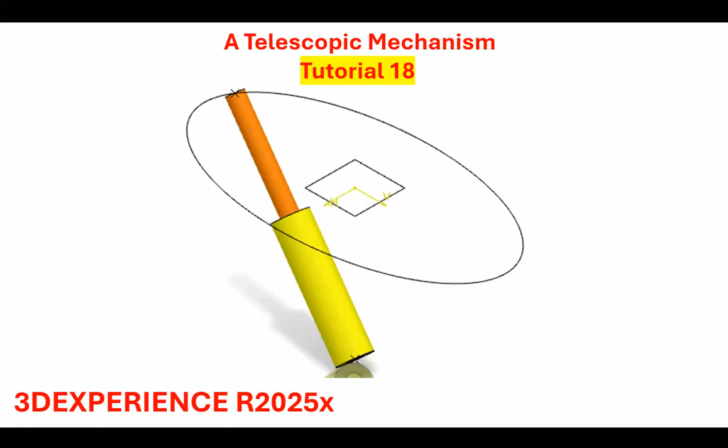Good morning, people. This is tutorial number 18, which is modeling a telescopic mechanism in the 3D Experience Release 2025X platform. Now, what we have here is three parts. The parts are the base. This is the base that's fixed in space, is not going to move.

Okay, and I have a big tube and an inner tube, small tube, and the bottom of this big tube is going to be coincident with the point that's in the base, and that makes a spherical joint. This small tube is inside of that big tube, and it can go up and down. And that's going to be either a cylindrical or a prismatic joint. I'll make comments about that in a minute. And the top of this small tube is actually traversing that curve.

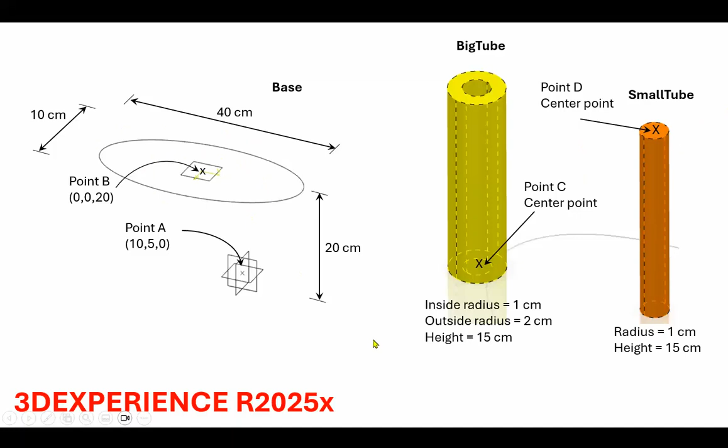Okay. Now, first of all, if you make this thing cylindrical instead of prismatic, there will be an extra degree of freedom that we don't want. That's going to go away. So I'll make this thing a prismatic joint. And notice that because the bottom is spherical and the top is the point curve joint, this whole telescopic unit can actually spin about its own axis, and we don't want that. This is why you do a point curve joint, a prismatic, and a spherical joint.

But then to take away that extra degree of freedom of spinning motion, you need to create a point surface joint. And the point belongs to the base, and it will go through this surface, and this surface really is the plane of either the big tube or the small tube. It makes no difference. So that takes away the spinning motion. So that's what this comment is about. First of all, we want prismatic here, not cylindrical. And then at the end, I want to create a point surface joint that may not be obvious why.

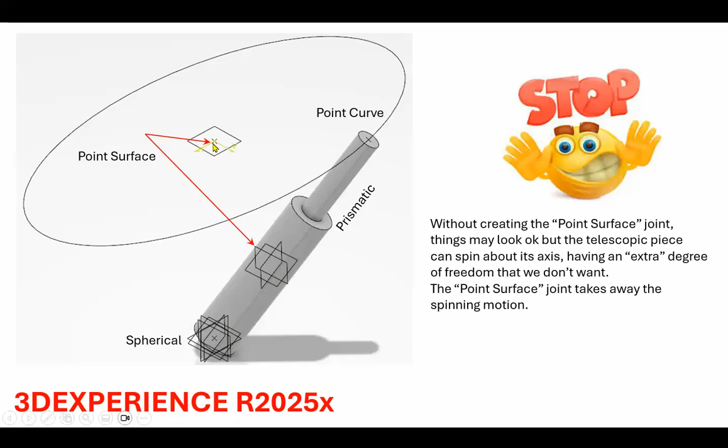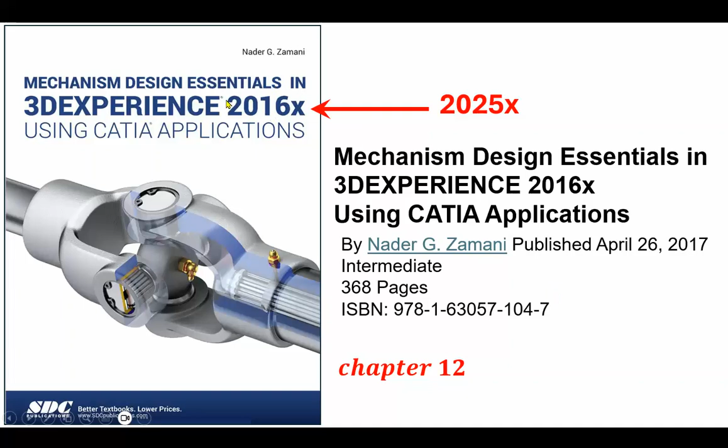This is coming from chapter 12 of the textbook that was done 9 years ago. And instead of revising this book, I've prepared these video tutorials. Okay, let's go ahead and do that. So we go here. We're going to start with an assembly.

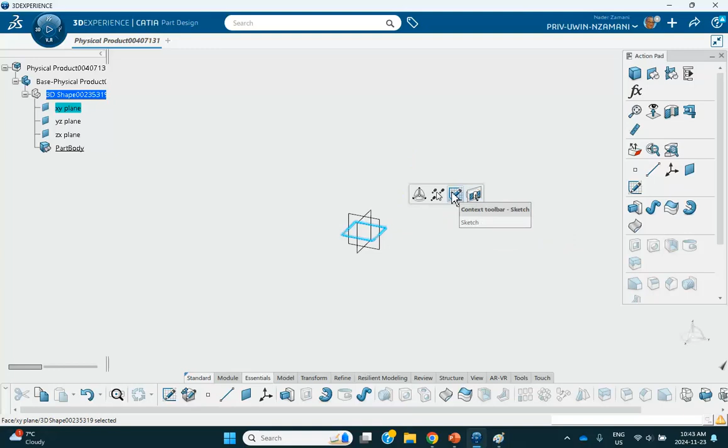Insert the base. So right click, insert 3D part. This is going to be the base. Let me modify the name slightly so that we know what it is. Here's the base, and there's an instance base. Say okay. Let's double click on it and make it. Very simple. On a horizontal plane, I will sketch a point that is 5 and 10 away. Actually, let me exit this. Just create a point with coordinates x of 10 centimeter and y of 5 centimeter. So instead of doing it in Sketch, I created it right there.

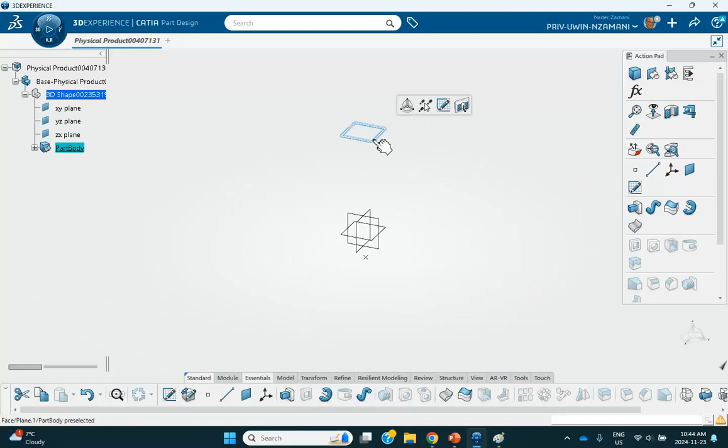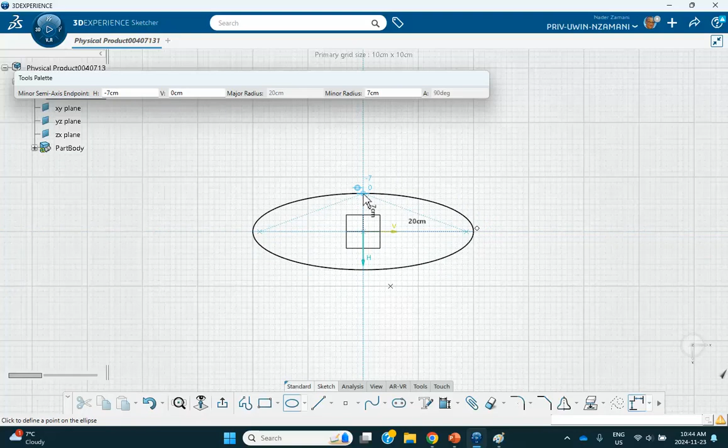Okay. Now, I want to create an ellipse up there which is 20 centimeters away. These dimensions really don't make that much of a difference, but I'll make a plane offset from this plane 20. Okay, and it's right up there. And on it, I will sketch that ellipse. So here is the ellipse. I want this to be roughly 20, and this roughly 10. Okay. Exit. So there is my ellipse.

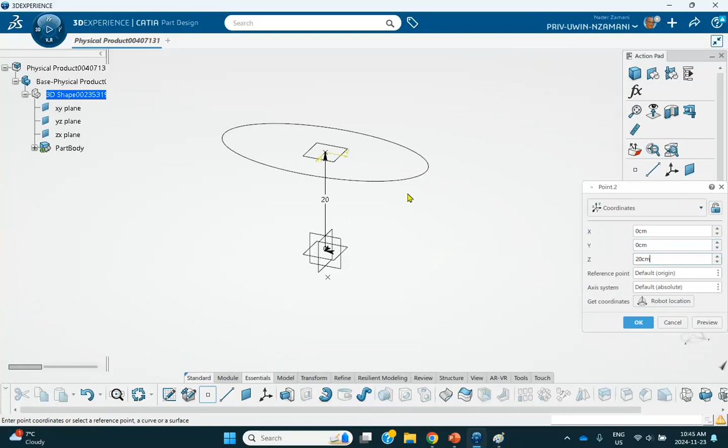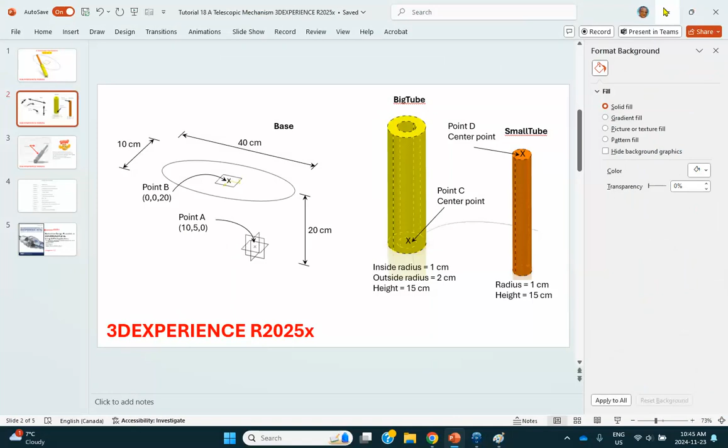And I want to create a point here because later on we're going to be using it. I mentioned to you why. So height of 20, and this is 0, and this is 0. Okay, so it's going to be right there. So what I have here is that plane, that point, and this point was already created, 10 and 5. Okay, so that takes care of this.

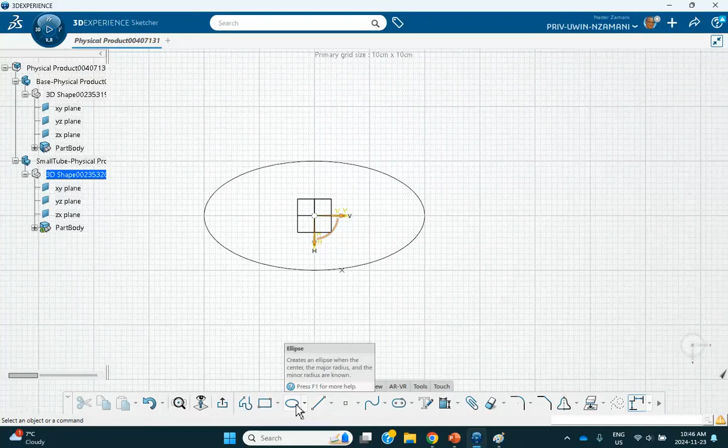So let me go all the way to the top, insert 3D part, and I'm going to call this thing small tube. Let's make it. It's just a cylinder. So I'm going to double click on this thing. On XY plane, I will sketch a circle of radius 1.

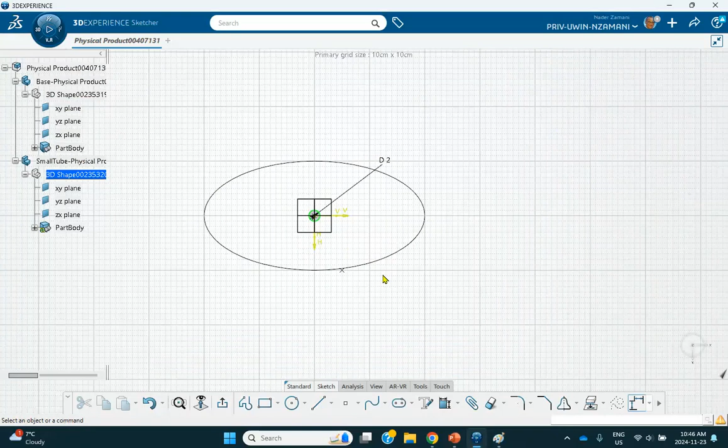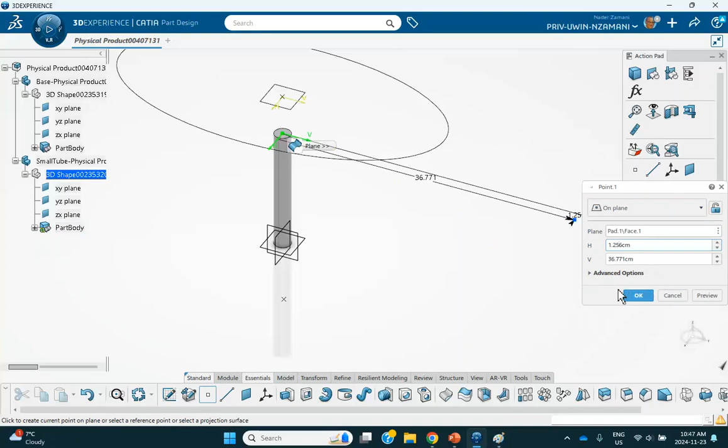Radius 1 centimeter. Actually, this is the diameter, so I'll make diameter 2. Radius 1, diameter 2. Okay, fine. And exit. And pad it by 15 centimeters. There we are. I also want a point on top of this. So let me make it point by circle center. I select that, so the point is created. Oops. Circle center. Try it again. Okay. Let me get rid of this.

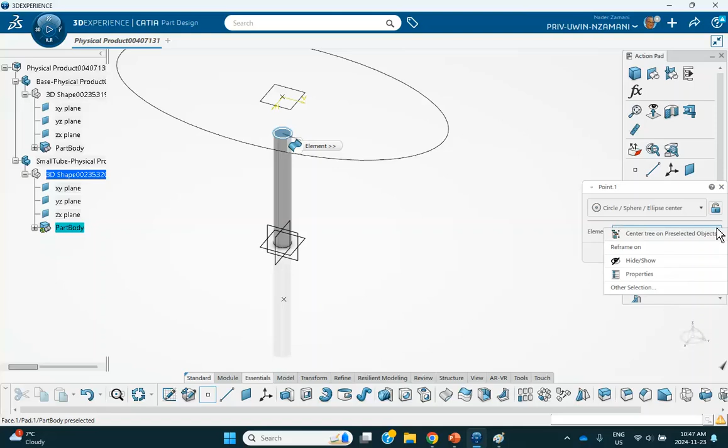Clear this. It's easier if I just close it. Let me try it again. Point, circle center, select that edge, and there we are. And then we say okay. Okay, right there. Now, that takes care of this.

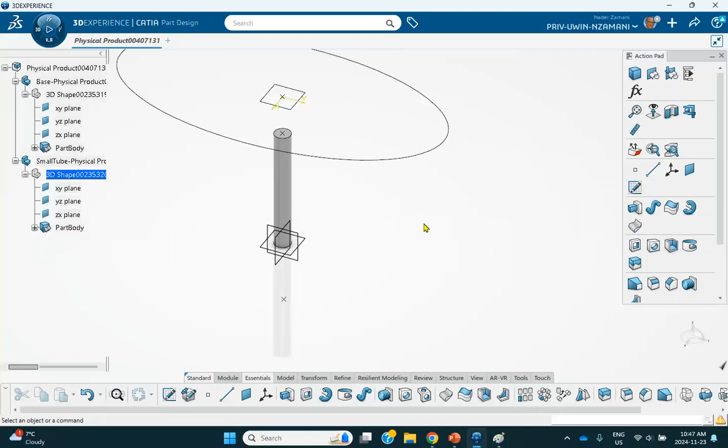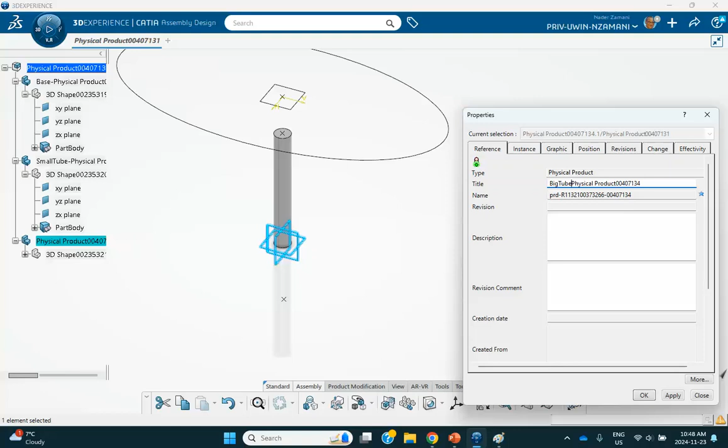So I'll go all the way to the top, insert, right click, 3D part. Let me call this thing big tube. Big tube. Tube. Yep. Let's go make it. So double click on this.

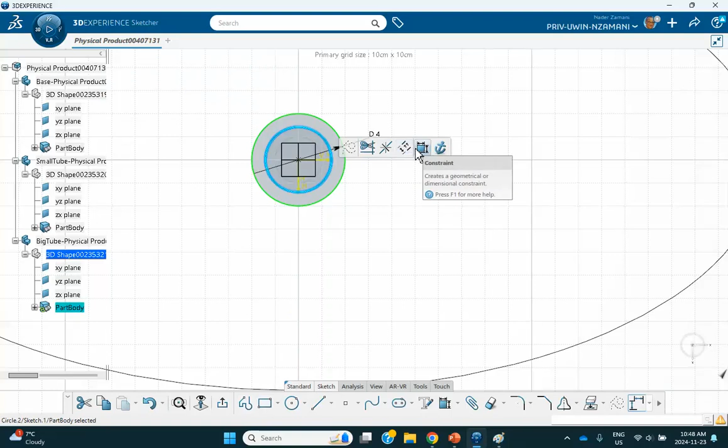On a convenient plane, I'll use the same plane and draw 2 circles because it's going to be a tube, right? So this one, I'm going to make that diameter 4. And another one, the diameter 2. I could have projected that circle, by the way. Diameter 2. And then we say okay. Exit. And then pad it

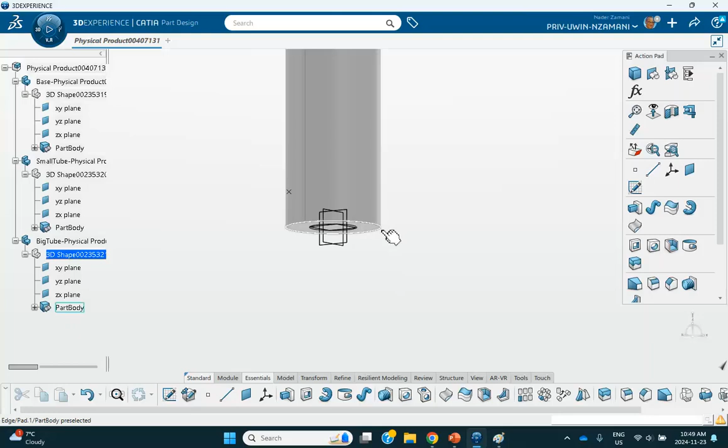by 15. Good. And at the very bottom of that big tube, I'm going to make a point because later on I'm going to make a spherical joint. So that is going to be, well, it is 0, 0, 0, but I can say also circle and that circle. It's going to be the same point. Good. Okay. We are good.

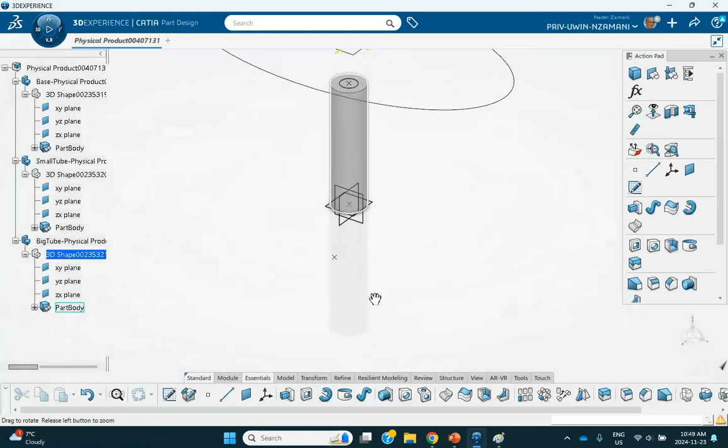So let me go all the way to the top, move these things apart. So I'm going to use the manipulate. Oh, before I do that, let me just fix this higher base. So under engineering connection, fix, the base is completely fixed now. Good. See that it's here under engineering connection.

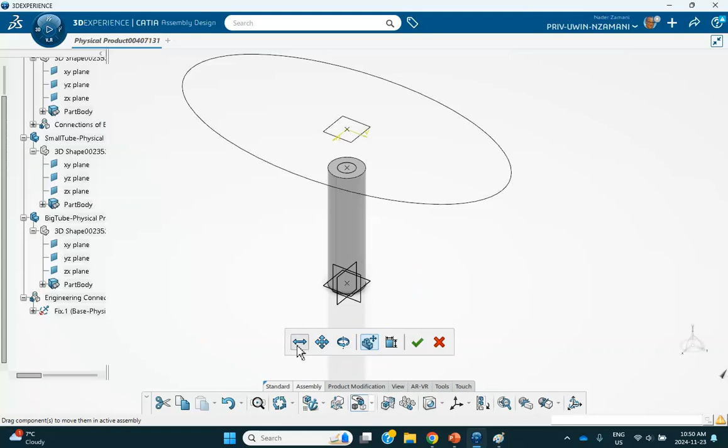Now I'm going to translate this. I'm going to translate it in the direction Y. There we are. This is one of them. This is the other one. So, okay. Now, if we want, we can make the prismatic joint right now. Let me also move this thing a little bit up so that I can see it better. Good. So, we need to make a prismatic joint here.

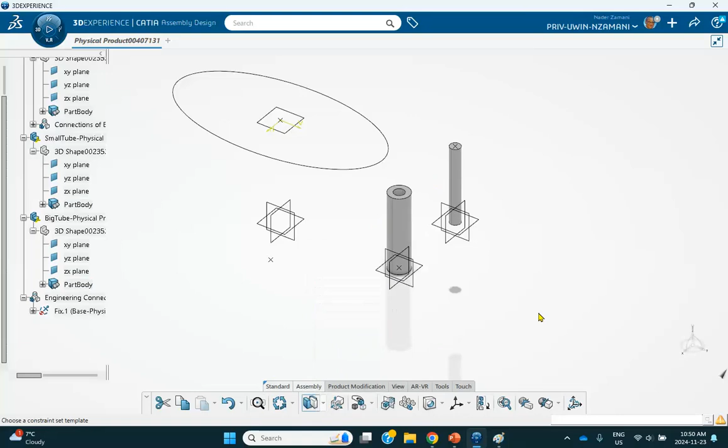So let's go ahead and get the prismatic joint. And the different ways of doing it, we'll do axis to axis, plane to plane. I'll do this one, axis to axis. What is that thing called? I'll use coincidence. I'll use this one. I'm not going to worry about the bottom, the constraint. So axis to axis, plane to plane. So here's what I'm going to do. This axis and that axis, and then the vertical plane of this and the vertical plane of that. That makes it a prismatic joint.

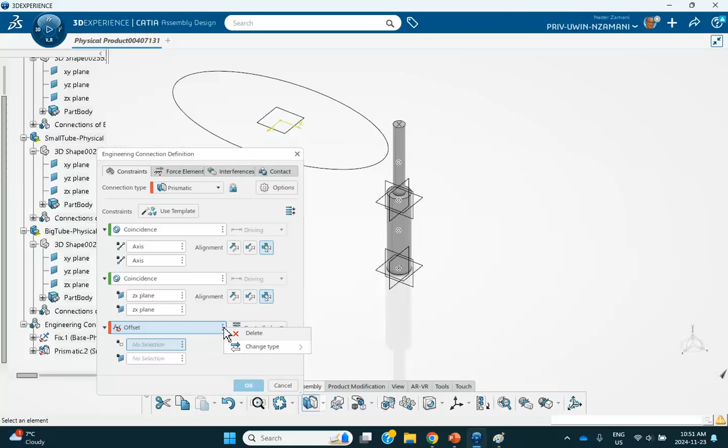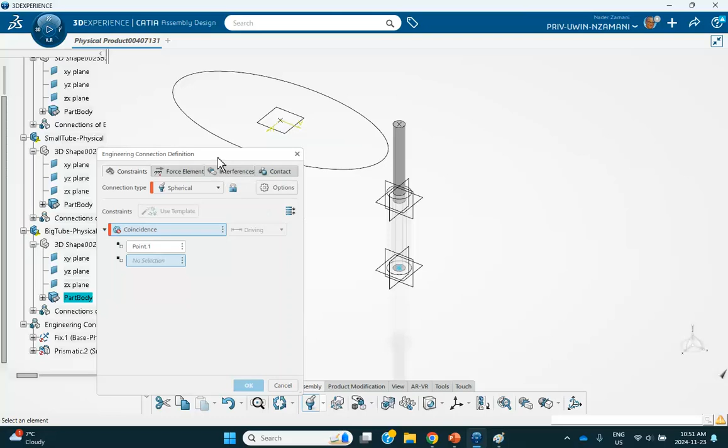Now, we're not going to be controlling this thing, so I might as well get rid of that. I don't want the last item controlled for control purposes. We don't want it, so we say no. Good. Now I'm going to take this point and put it there. That's a spherical joint. So we go here, we go to spherical. We can do point to point, coincidence between this point and that point, and then say okay. Don't worry about clash and update.

There we are. Now I'm going to take this point and put it on that curve. Now that, for example, I can do point curve joint. I don't see point curve here. So I go to engineering connection, pull this thing down and find the point curve right there. And I'm going to make, for example, a point and a curve. Okay. So, and it's going to be controlled, right? It's controlled. So that's what this thing is.

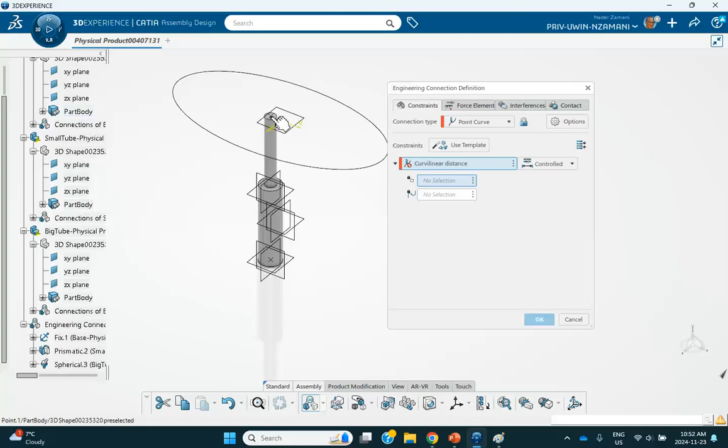So, where is that? The point is right here. It's up this small tube, and the curve is right there. And then we say okay, now, and update. Okay, very good, very good.

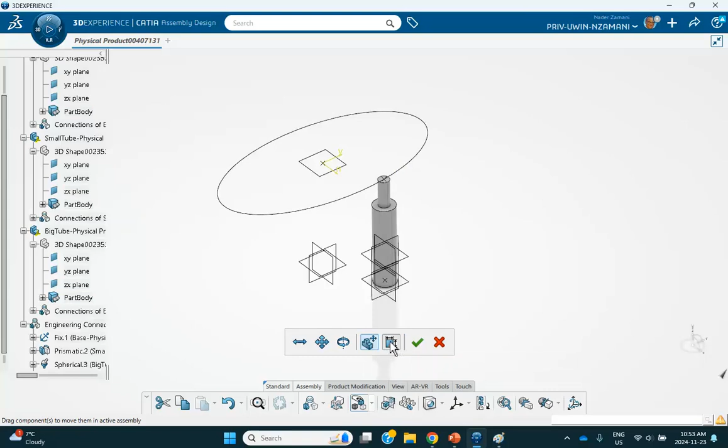Okay, let's see if we can actually check things, see whether things work before we actually go and create the mechanism. So we go to once again move. What is that? Manipulate. I'm going to move this, but I want to keep the constraints in place. So I'll check that, and I'm going to translate this. You see, constraints are respected.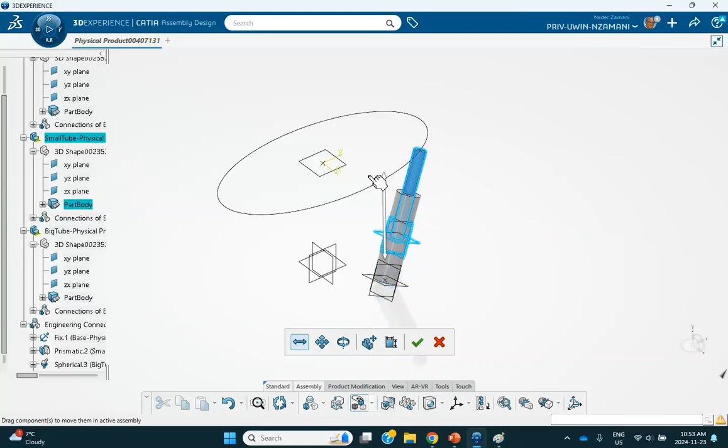And without that, you can just move it, but the problem is that constraints are not respected. That's why you go off position. So just close it. Good. So we are on the right track. Now that point surface joint, I can do it now, or I can do it later. Okay, so let's go ahead and do that now. So we go here.

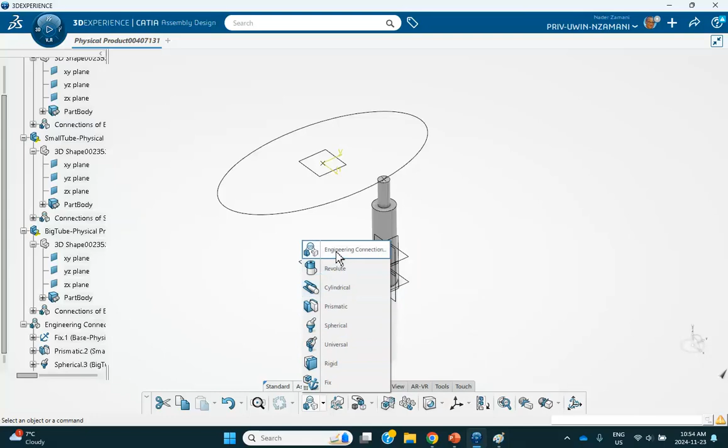We won't see point surface, point curve, and some of these other joints here, so you have to go to engineering connection, hold this thing down, find the point surface joint. Okay, it says the point. I want

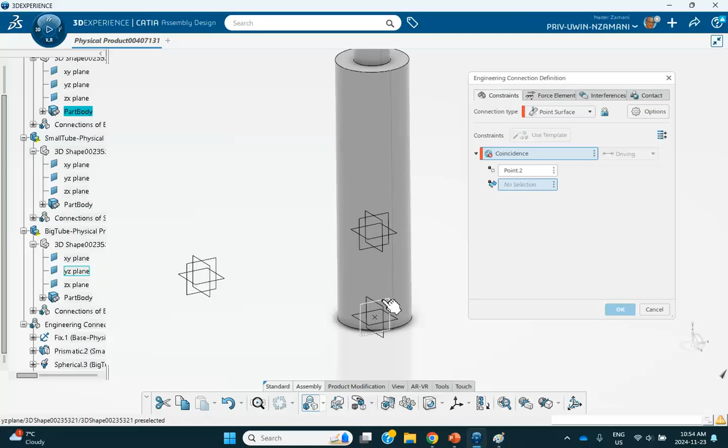this point to always go through either this plane or that plane, or this plane and that plane. It doesn't matter which one you use, so I'll use, for example, it makes no difference. I'll use this because just to convince you that right now this is not on the same plane. But when I create it as a new joint, what it does is it kind of rotates this

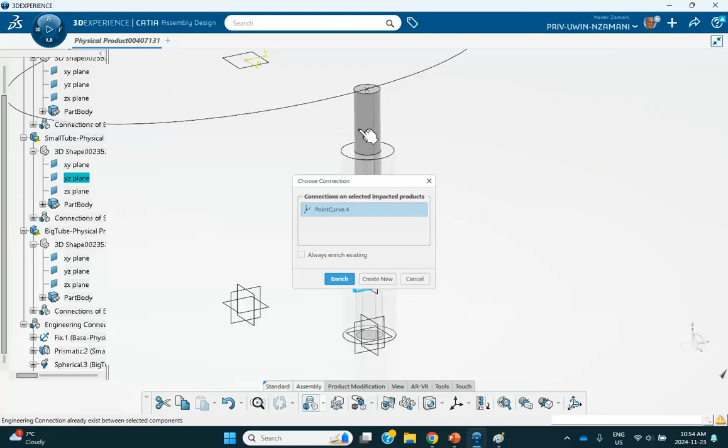thing and makes sure that plane goes through this point. Say okay, and update. I guarantee you that this point, this plane that I picked, is going to go through that. You can see it already. Okay, good, very good. So that takes care of everything here.

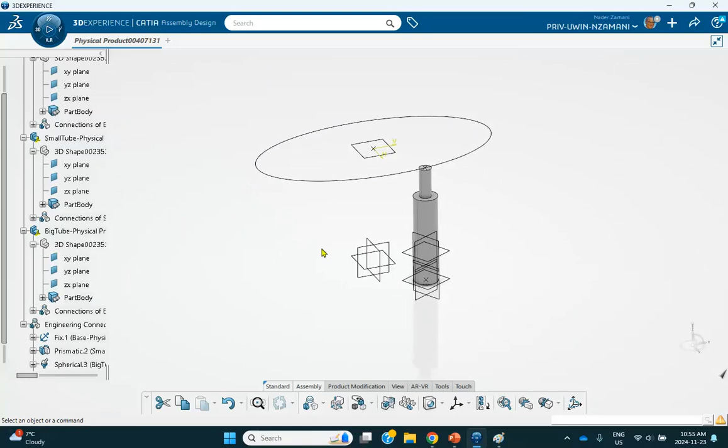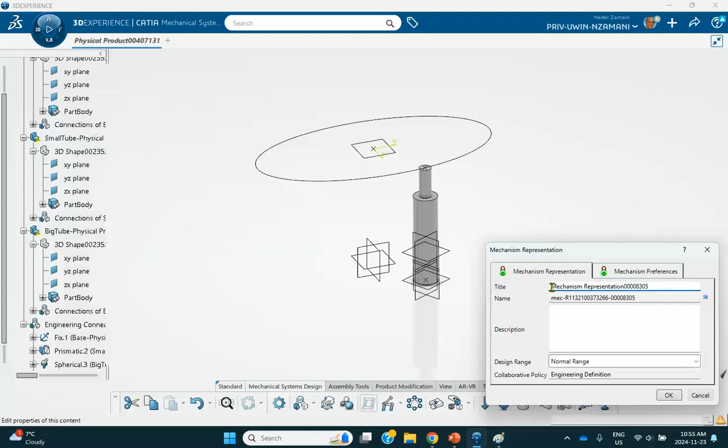So now we're going to go to mechanical system design. You can go here or go there directly, that's entirely up to you. But let me, as in the other tutorial, let me go to mechanical system design and create the mechanism representation. Just create it. Here is the name - you can call it anything you want, you can call it the telescopic mechanism. Give it any name that you want. Just leave it the way it is.

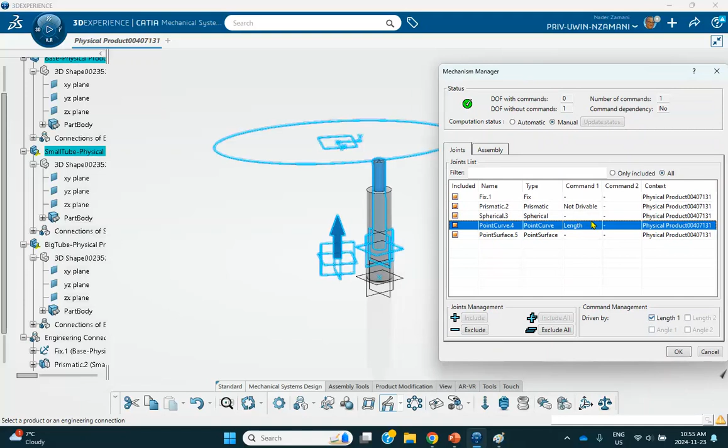And then let's check our joints. Notice that there is a nice one here, that means the mechanism can be simulated later on. Point curve joint is length driven, you can see that. Say okay.

We can always check - go here to get the mechanism player. 1 degree of freedom, so this thing goes all the way around. Now I could have made these things a little bit longer so that it looks nicer, but that's easy to do. Let me actually go ahead and do that.

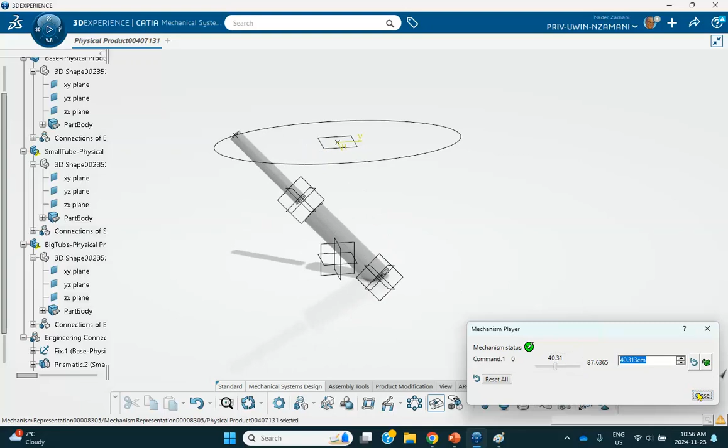So let me go to the big tube. There is the big tube. The pad, instead of 15, I'll make it maybe 18. I'll make it 18.

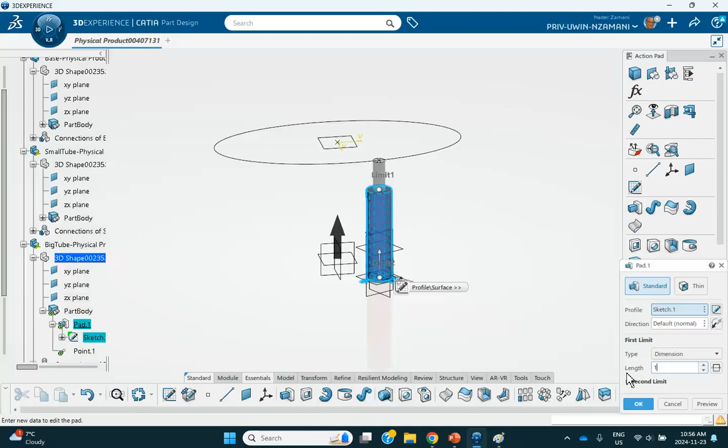Okay, good. So back to mechanism. Back to this - it's more like, looks more respectable.

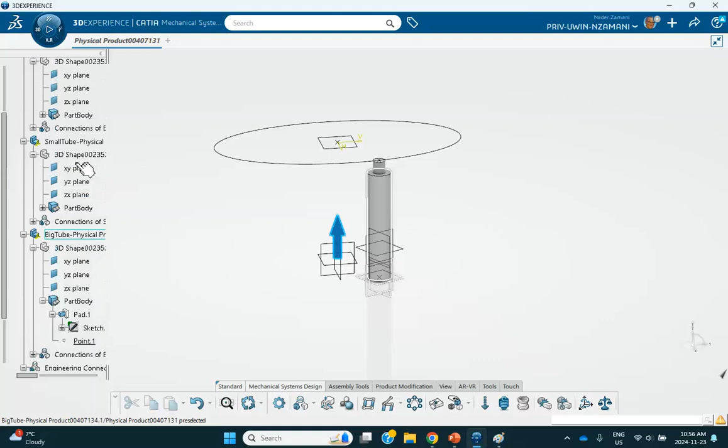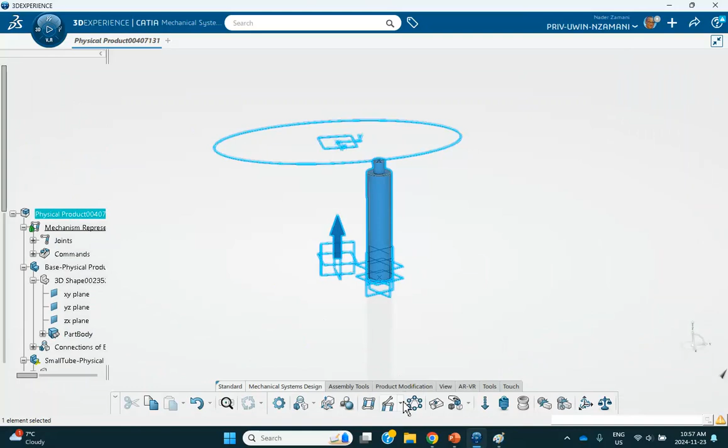Now I can make this thing also longer so that it looks nicer. So back to small tube, here's the pad. Where's this pad? Okay, so I'll make this thing also 18. Good, and exit and update. And now you can check it out - it looks nice. Okay, reset.

Now this is just a cartoon, there is no physics here. But suppose I want to specify the velocity of this point on that track, on that ellipse. So in order to do that, you need more than just making the mechanism - you have to go to mechanical systems experience.

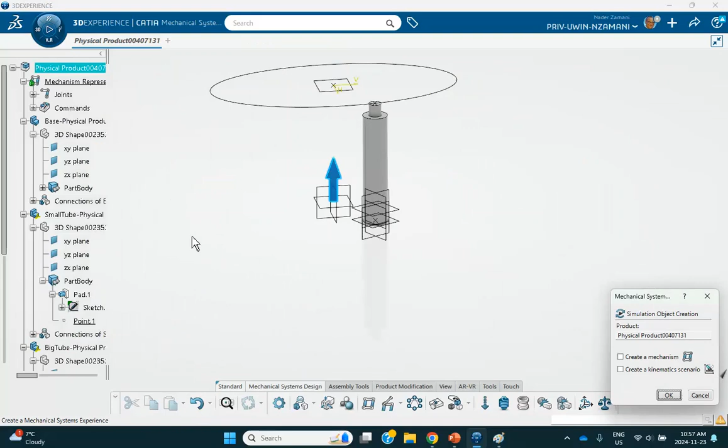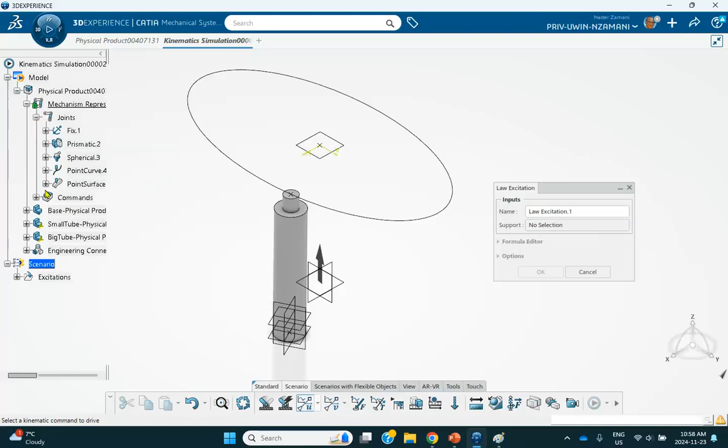And this is the name. And what we want, for example, is the speed of this. Now that means you want different ways of doing it - law excitation is one. The support is that joint, and the command on it, that was a point curve joint.

Oh, under the command, that's what I want. There, inspect it. By the way, this whole thing is 77 centimeters - this is centimeters long, just to remind you. Click on f of x. So right now I am at that location.

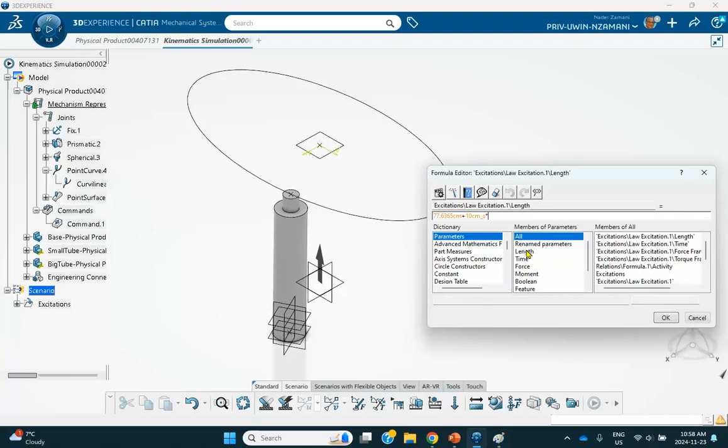For example, I can add to it - plus. Let's make it 10 centimeters per second, 10 centimeters per second times time, and then say okay, and then say okay.

Now we're going to create a kinematic scenario. This is the excitation that I created, we send it to the right side. Let's do it for 10 seconds, see how it's going to go.

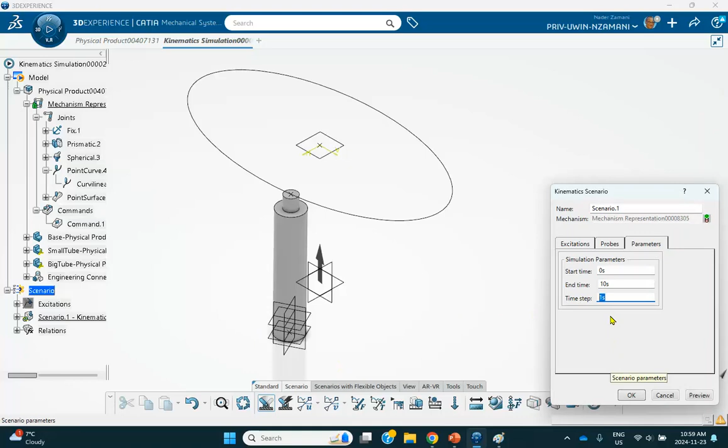But this time step one is too big - things are going to be very jagged if you do it like that. Say okay, I made it 0.1 and see how it looks like. And then we're going to compute.

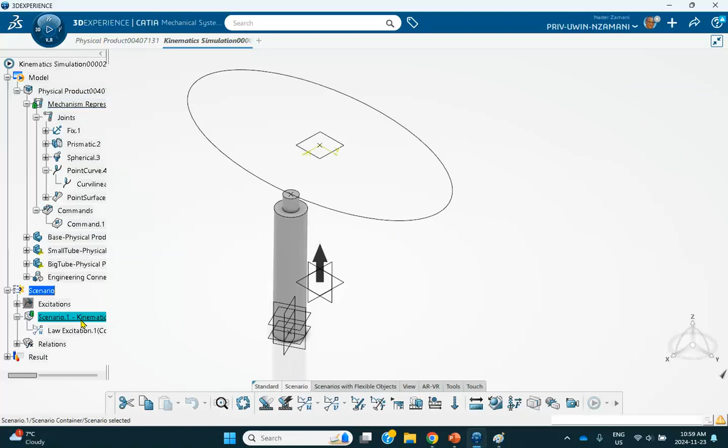Okay, I think 10 seconds was probably shorter than I wanted. Let's actually make it longer. So where's that scenario? Back there. I'll make this thing 30 seconds, probably 3 rounds. And I'll make this thing, I don't know, 0.05. Let's see how it looks like.

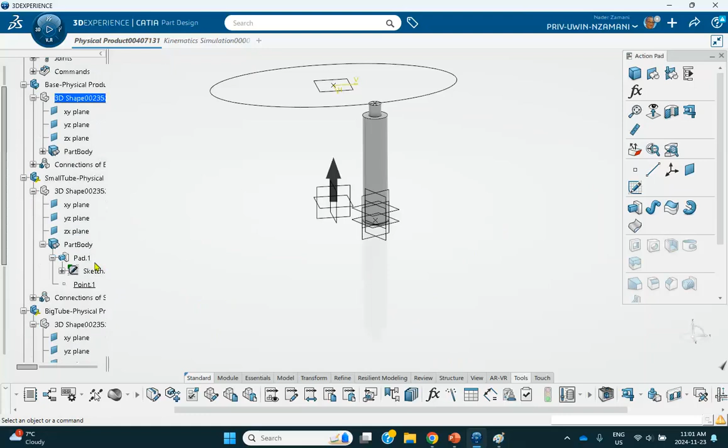And run it - 1, 2, 3. So that's fine, you got it to work. And that's pretty much it. Good luck.